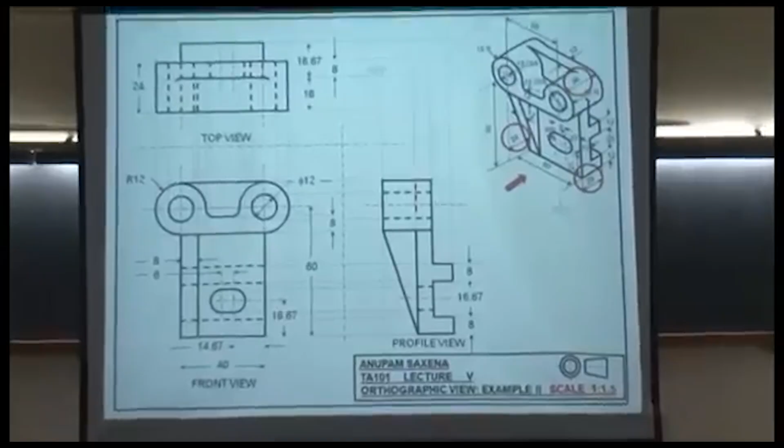So we were discussing this example before. You know, I'm really very glad that you have started thinking in class. All right, settle down. So quite a few of you guys had questions about the drawing that we were discussing yesterday. In particular, I had drawn an arc here, or fillet, if I may call, and a fillet here, and many of you said, if there are two fillets here, then this actually happens to be a smooth surface, and correspondingly there would not be any line here, here, and here. True? Okay, so this was the doubt, no?

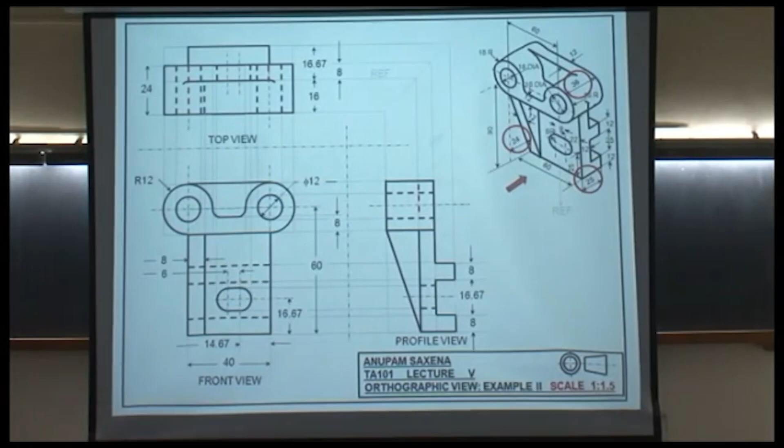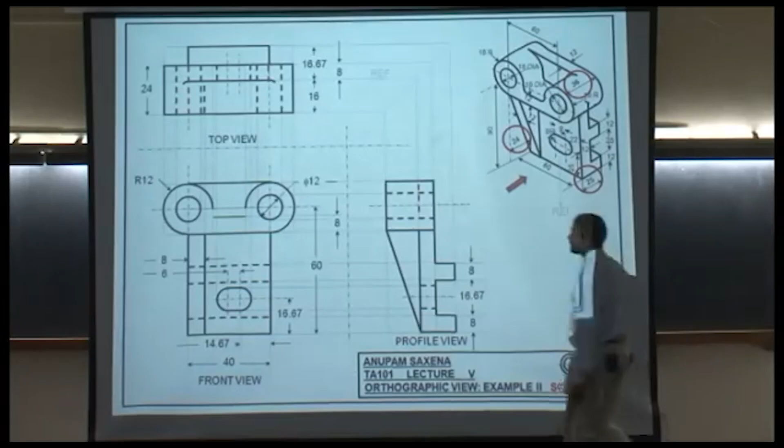Let me propose a few changes in the drawing. What I do is I let go of these arcs, I have a line, I extend vertical lines from these points, and if this is the scenario, then do you think that I'll be getting the corresponding lines in the other two views? So I'll be getting the corresponding lines in the other two views, okay? But think from a realistic viewpoint. Is it possible for you to manufacture this object with perfect 90-degree angles here and here? Yes or no? No.

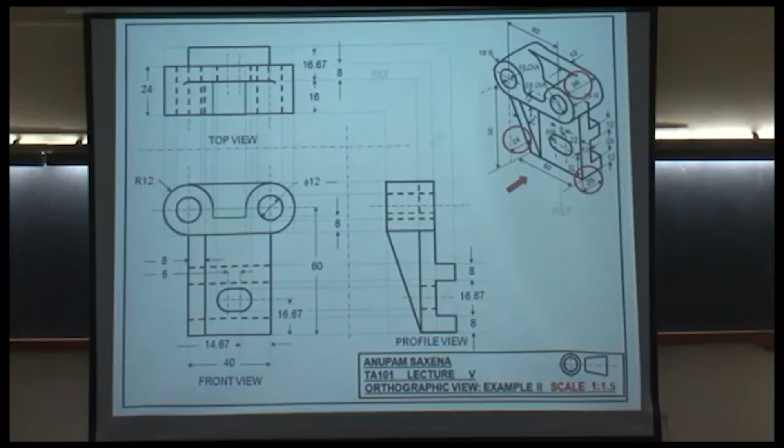Realistically, there would be a little curve here and a little curve here, okay? So let's draw that. A little fillet. It's probably not so discernible, just a little fillet, but the corresponding lines in the other two views will still remain, okay? All right. Any questions? Yeah? Tell me where are these lines? Can you show this model to me?

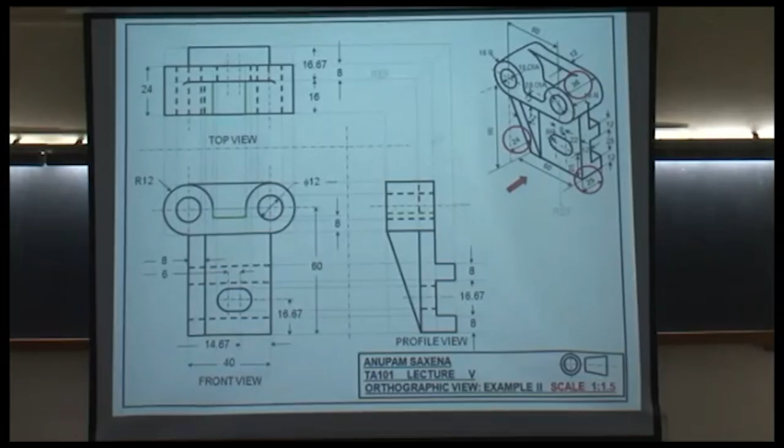All right, so just for your benefit, since you have worked quite hard, this was the initial drawing, and in fact this was a question that was raised by you. So this is like a smooth surface, and correspondingly there would not be lines in the other two views. Makes sense. But what I'm proposing is a slight revision. What if I let go of these smooth curves, have a horizontal line, extend the circular arcs through these vertical lines, and I get perfect 90 degrees. Then I'll have those lines. Why not?

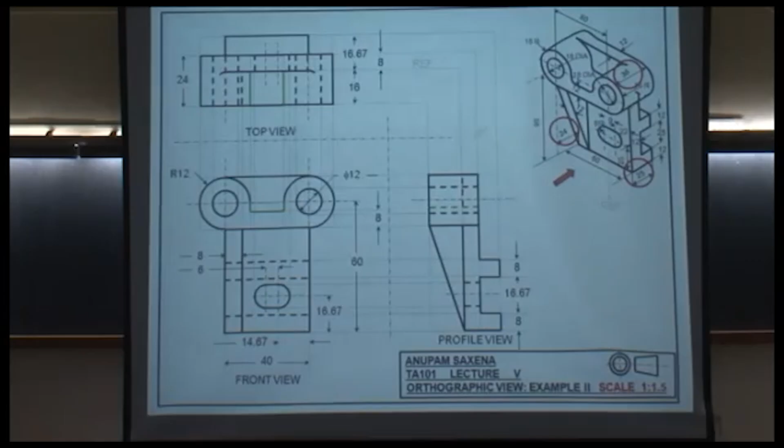In this scenario, are we going to be having those lines? We will. We will, right? Now, there's the theoretical aspect and there's the realistic or practical aspect, okay? Practically, it will be a little difficult for you to make a perfect 90-degree angle. It will be difficult, okay?

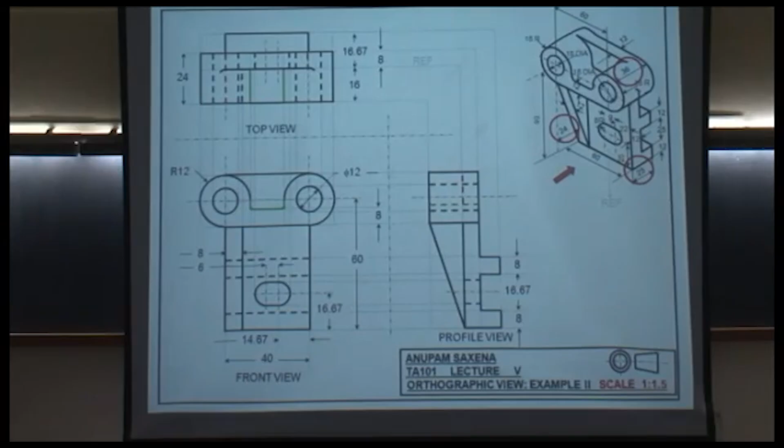So practically what we do is, you'll actually be seeing surfaces like this, okay? Just a little fillet, just a little fillet. But assuming that these two angles are 90 degrees in the front view, you will actually be seeing those lines. Slight revision that I proposed. Okay.

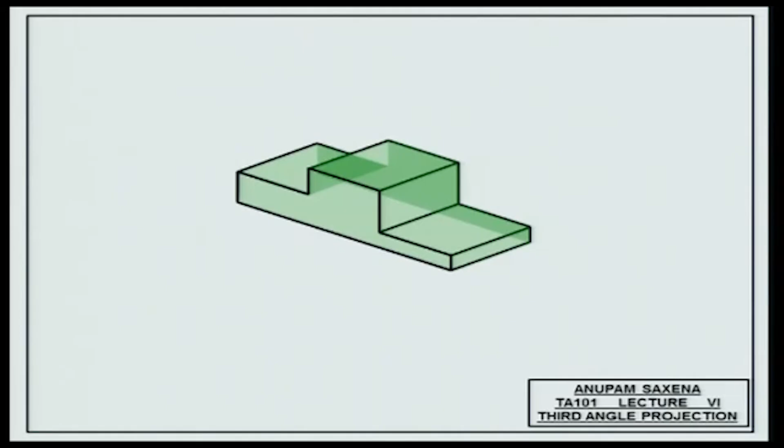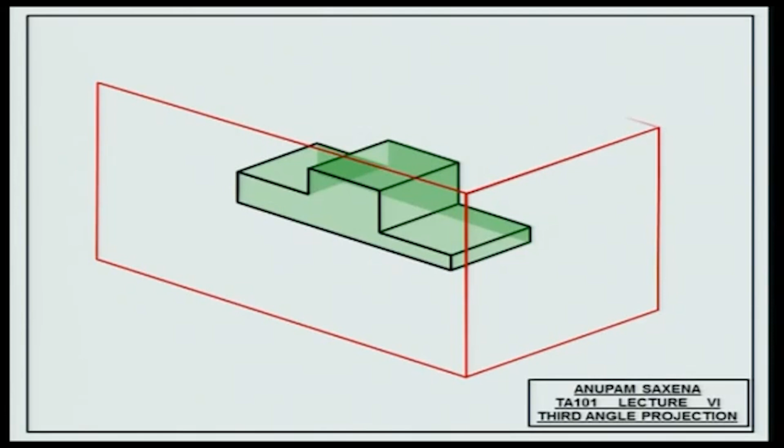You had a plane in between you and the object. You imagined that there were light bulbs all along the edge of the object that emitted light along 3 orthogonal directions. So this was the plane on the right, again in between you and the object. On top, again in between you and the object. These are the lights.

The light rays falling on the vertical plane, and this is what you would see if this plane was a photographic paper. This is what you would be seeing from the top, and this is what you would be seeing from the side. We have done this before, right?

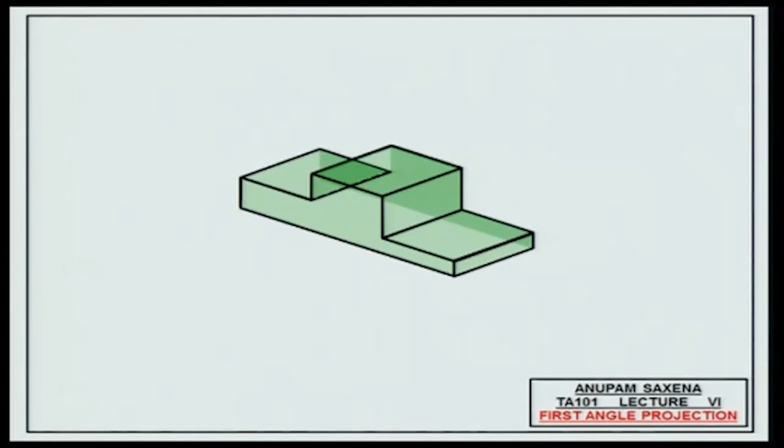Let's consider the same object, but we will consider a different scenario. We'll say instead of the plane being between you and the object, the plane is behind the object. So the object is placed between you and the plane. So this is the vertical plane that's behind the object. The horizontal plane is to be placed below the object, and the profile plane is to be again placed behind the object.

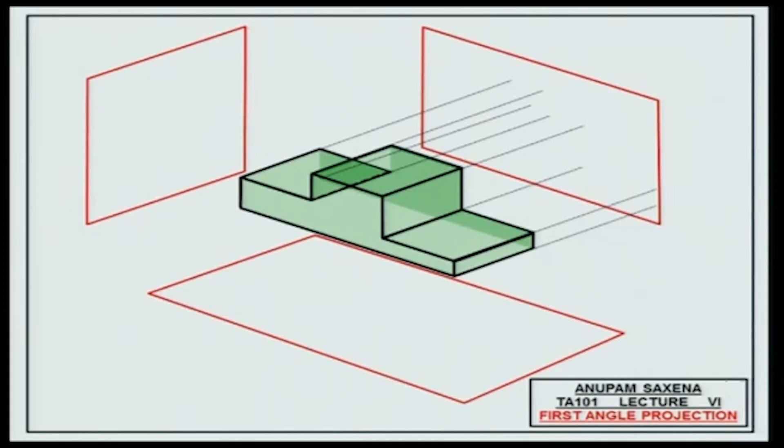All that has happened is the scenario has changed, the location of the plane has changed relative to you. In the third angle projection, the plane was in between you and the object. In the first angle projection, the plane is behind the object. Okay, and let's do the same exercise. Rays falling on the plane. What will these rays capture? What will these rays capture?

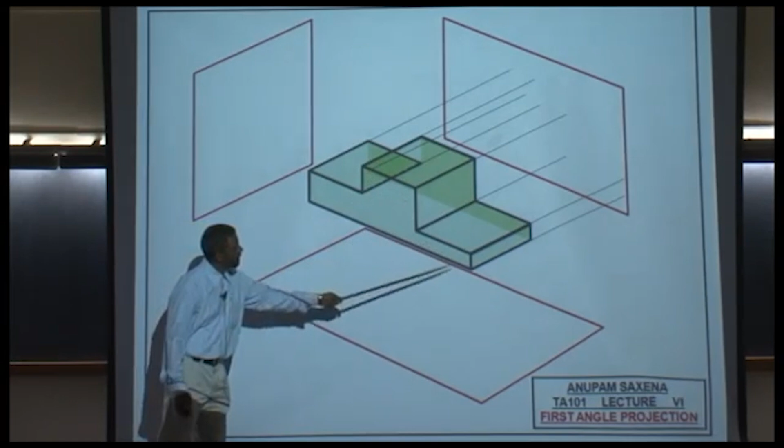The light bulbs are here. So these rays will essentially capture the loop that you see. Now note that the loop is coming from the front. The loop is going onto the plane from the front, not from the rear side of the object. Okay, once again. Right?

So what's the impression that the horizontal plane is going to see? Almost the same thing. The loop is going to come from here, from the top surface of the object. This one and this one. Once again, it's coming from the top of the object. How about this? Okay.

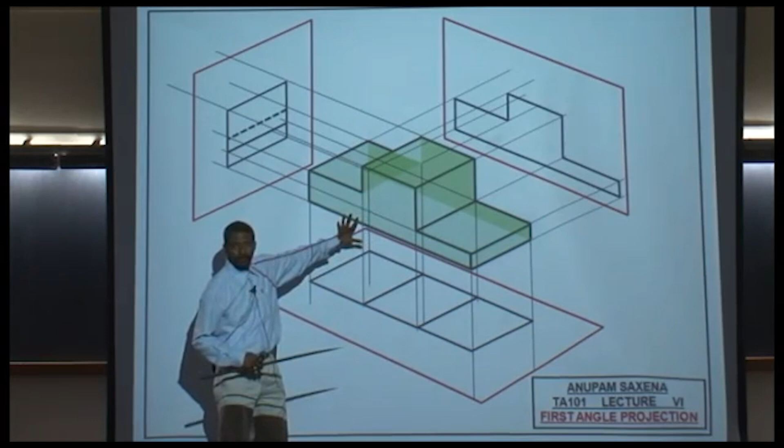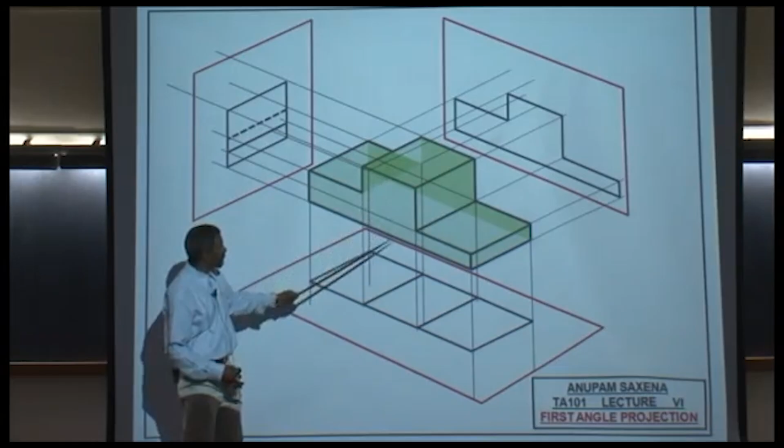Right, so what's actually happening? This plane is capturing what you're seeing from here. This is what is happening actually. This plane is capturing what you're seeing from the top, not from the rear of the object, but from the top. And this plane is capturing what you're seeing from here. Right? Okay?

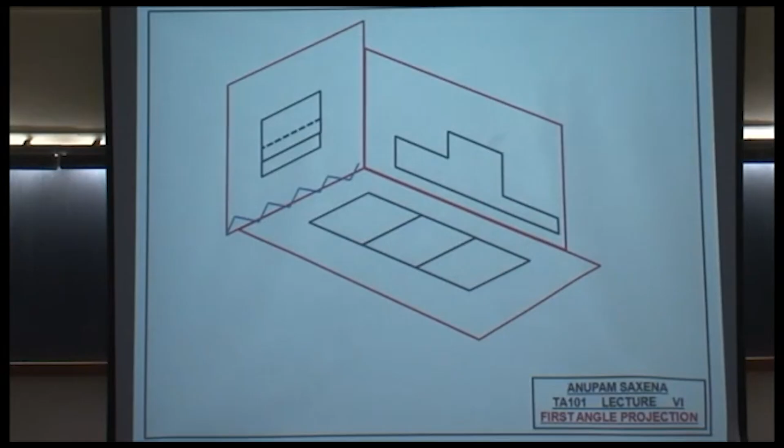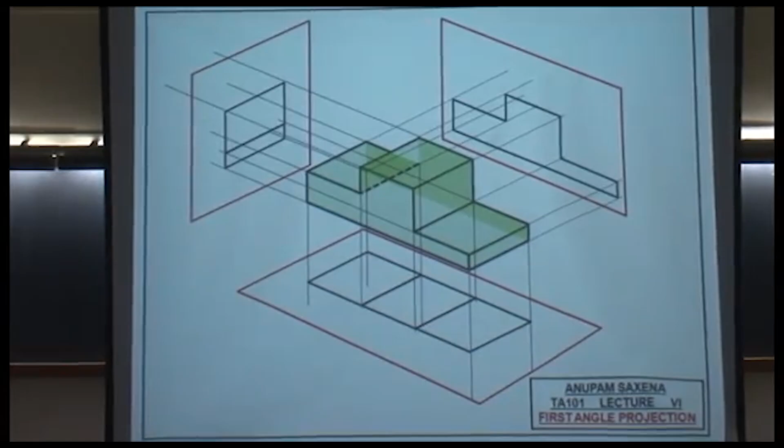Let go of the object, retain the impressions on the 3 respective planes, join these guys together, with that boom, tear this part off and unfold. Yeah? It's not from the other side.

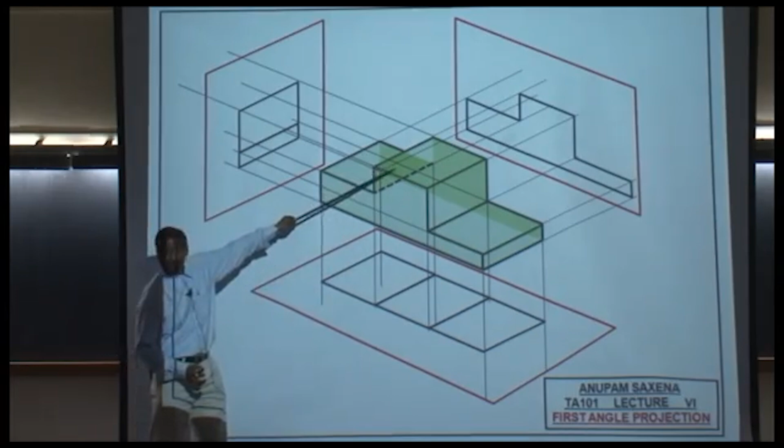If this is the direction of your frontal view, that plane behind the object captures the impression of the object as if you're seeing the object from this side. This one is from the top. This one is from here. So you need to be a little careful in trying to comprehend this.

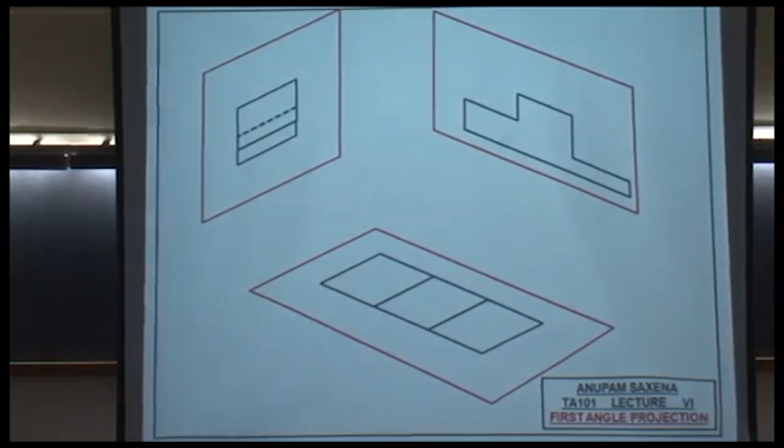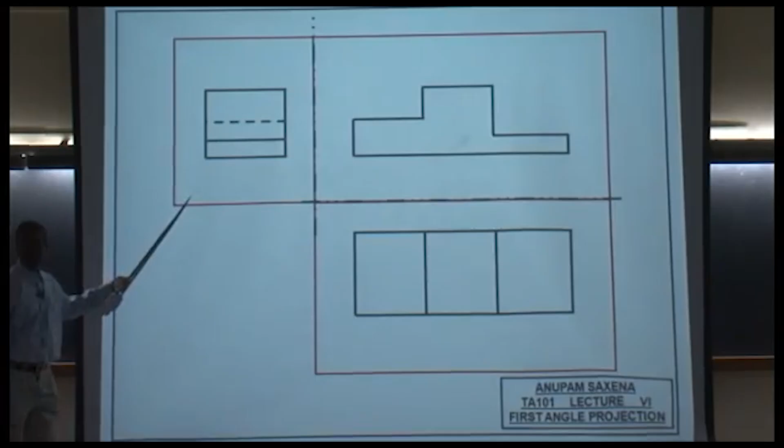Okay, once again, join these guys together. Tear this hinge, and unfold. Where is your front view now? Where is your top view now? Doesn't make sense, right? Top view at the bottom. Which view is this? The right side view. You were seeing the object from the right, so it's the right side view. Okay?

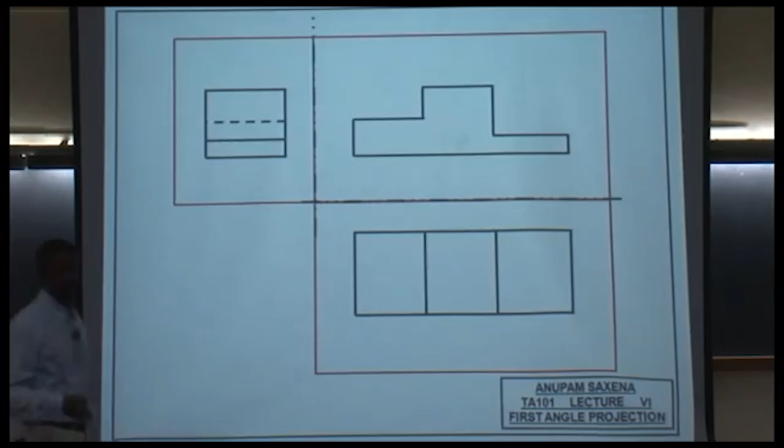Okay, so it's always a nice idea for you to get the concept so that you don't have to remember. And if you have to remember, then this is a very simple golden rule that I used to follow when I didn't understand this. In the first angle, the top is at the bottom of the front and the right is to the left of the front. Just the opposite. Okay? But this is the concept that's important, be it the third angle projection or be it the first angle projection.

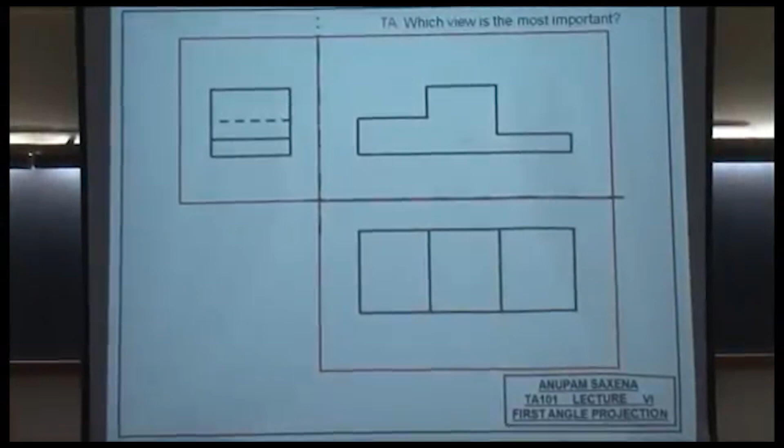You have been working with third angle projection. You have drawn the front view, the top view and the side view. Okay? Now can you answer this question to me or to yourself? Which of the three views is the most important? Which of the three views is the most important? Have you guys heard of something called FTP? FTP? File Transfer Protocol? Nah. That's the front view, top view and the profile view. So which one is the most important view? Front?

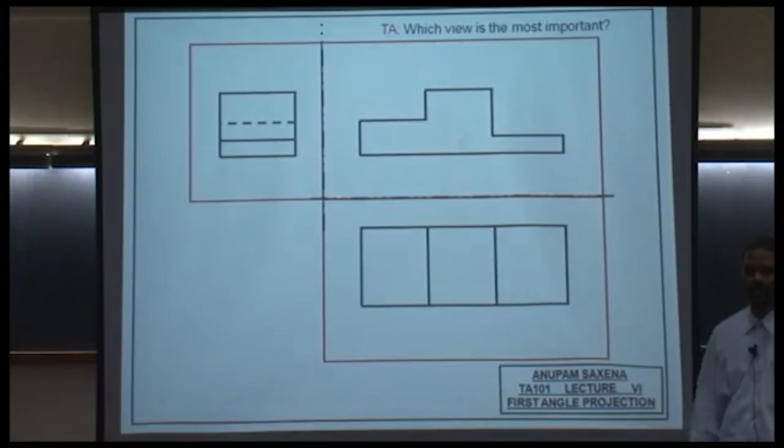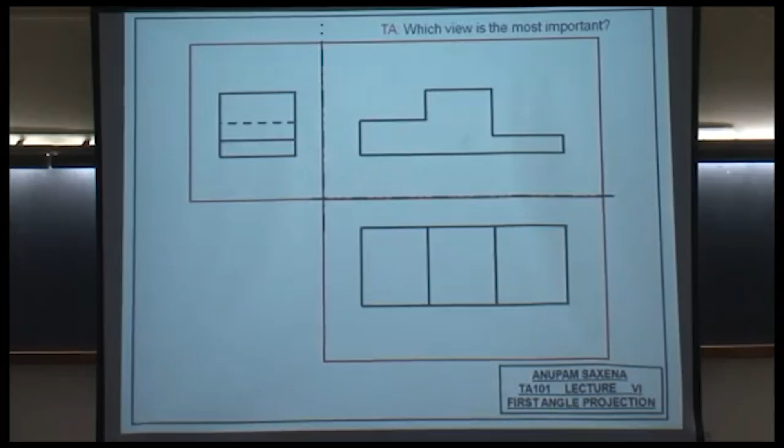Well, the choice is yours. But conventionally, we choose the front view to be the most important view. Okay, and having said that, we choose the placement of the object in such a way that we are able to give as much details in solid lines, not hidden lines, in the front view. What we try to do is we try to minimize, if not eliminate, the presence of hidden lines in the front view. Okay, that choice is ours. Right? So the front view is the most important. Then the top and then the profile, hence FTP, front, top, profile.

You know, I have never gotten somebody agree to me like that. Concurring with a song.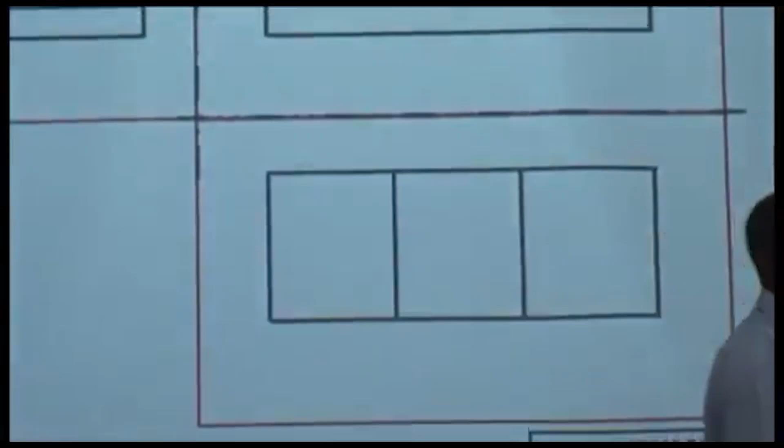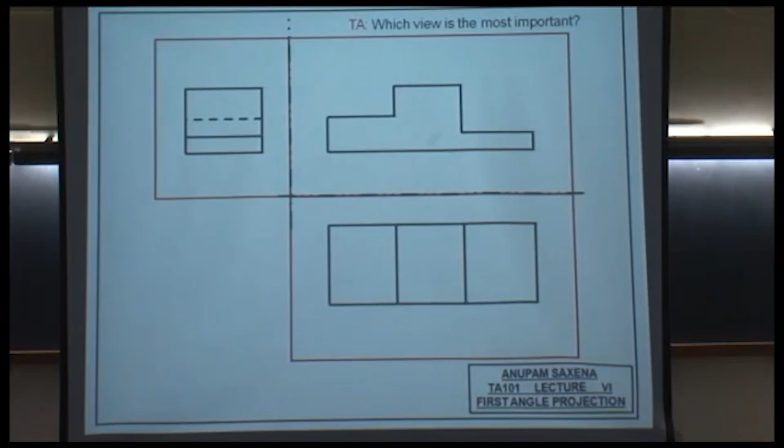Okay, why is this called the first angle projection? Why is this called the first angle projection? So if you imagine that your drawing is divided in 4 quadrants, your front view, which is the most important amongst FTP, is lying in the first quadrant, and hence it's called the first angle projection. Why is the third angle projection called the third angle projection? There your front view is here in the third quadrant.

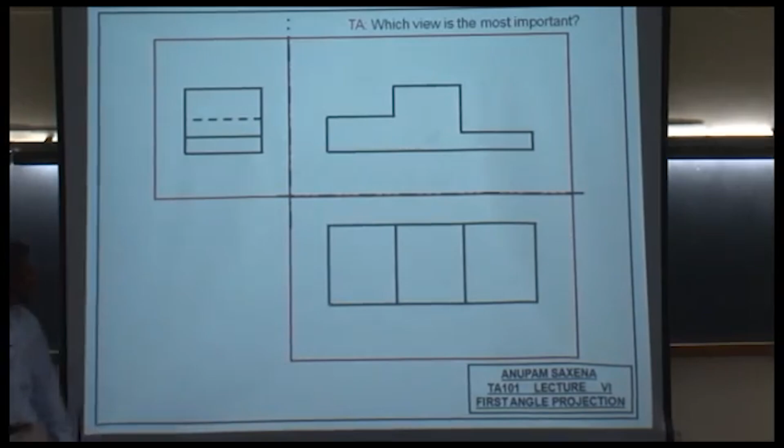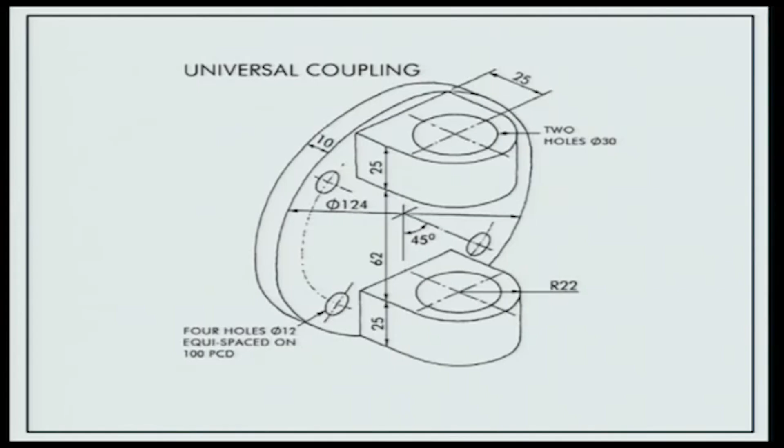Right? Okay, so let's draw this object in the first angle projection. Would you like to take 5 minutes to try to sketch? Okay, now. So before you start sketching, this is the front view direction, and you have to rotate the object like this. Okay? So rotate the object like this and then view it from the front and then start sketching. 5 minutes.

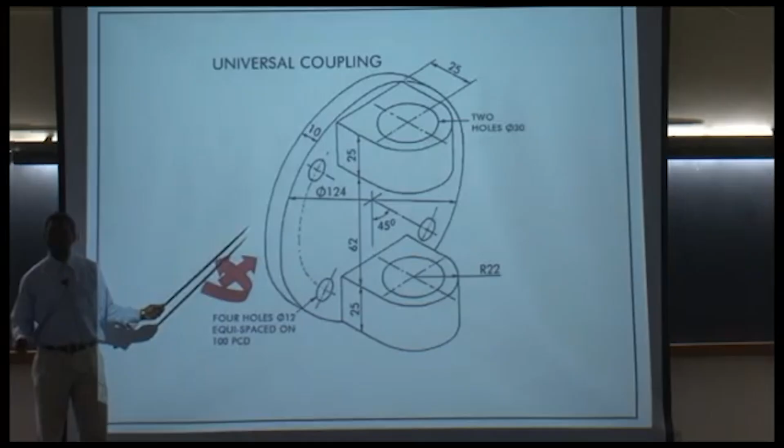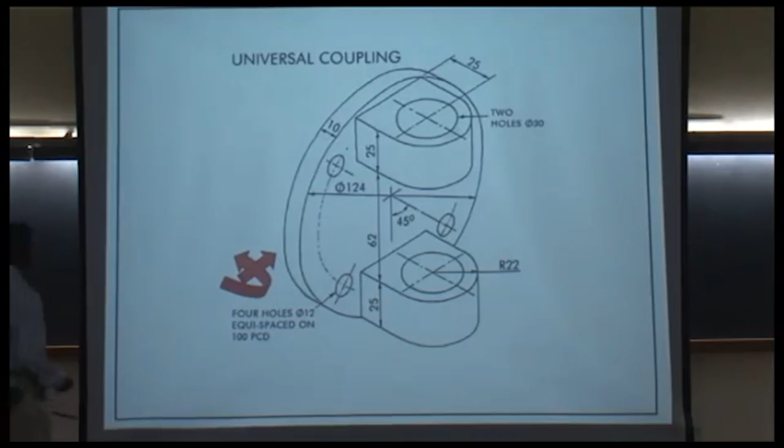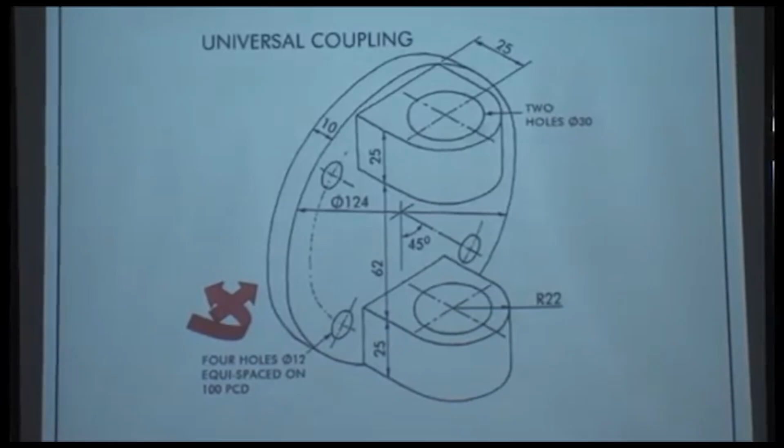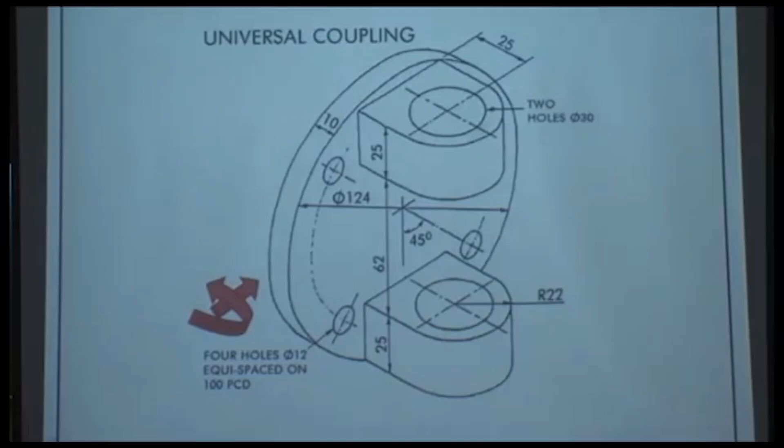You know, back in 1990, when I was in the 12th grade, we used to have this concept of the class monitor, right? So you have just graduated from grade school to grad school. So our monitor then was Sanjay Tiwari, and we used to talk a lot. We used to prepare for our JEE exams, and we used to talk a lot. And he used to have a hard time. He used to come up with a list of many students disturbing the class. And he gave the list to my class teacher,

and she goes like, Amit Raje, he was my classmate. And Amit Raje is all perplexed. He stands up, yes ma'am. Why were you talking? Ma'am, I wasn't talking, I was thinking. Okay, sit down, don't think loudly. Yeah, so don't think loudly. Huh? Sorry.

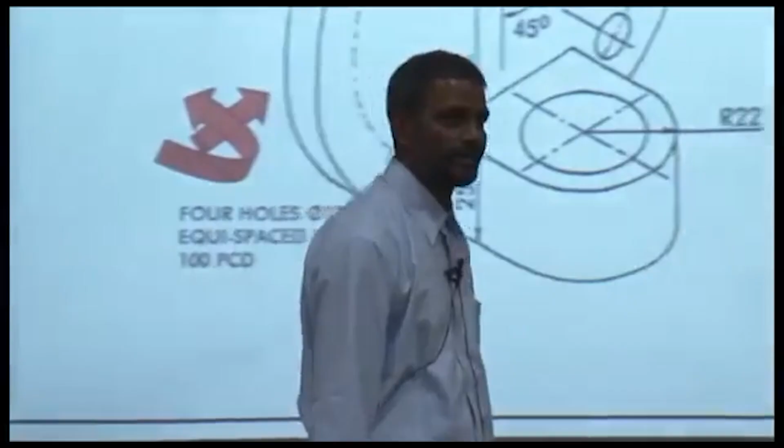I didn't want you to sketch that box. Should we start? It's already 2:29, so I still have about 20 minutes. So let me get started. Okay, so start with your bottom right box. Fill out the details.

This is the first angle projection. So your convention of representing the first angle projection will be different.

Can you hear me back there? Am I discernible? Am I audible?

So the convention to represent the first angle drawing will be slightly different. Again, truncated cone. Your front view is 2 circles, a set of concentric circles. What is shown on the left is what? Which profile? The right. Okay, so the profile on the right is shown on the left. So in the third angle projection, this guy was here. In the first angle projection, this guy will be here.

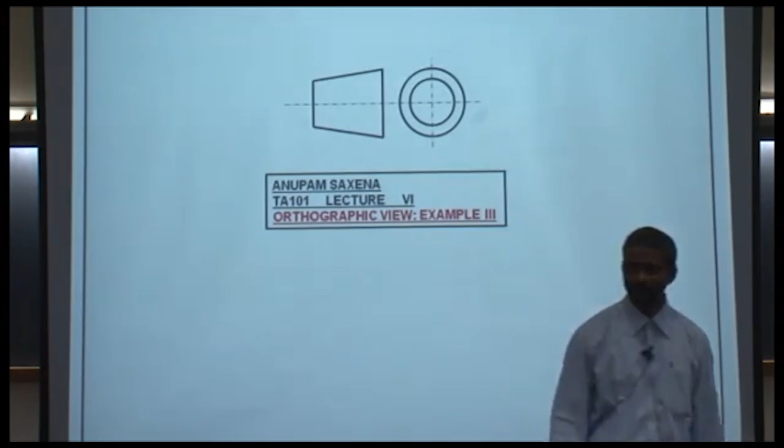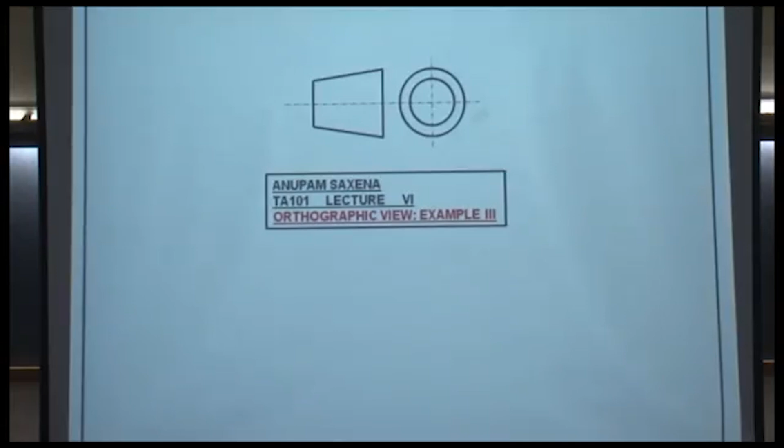If I were to draw the orthographic projections of this, how many views will I use? 2, 3, 1, 2. Why not 3? The third is the same as the second? Okay. So although we are practicing 3 views at this time, later on you will probably realize that in certain situations 3 views are redundant. At times just 2 views suffice. And at times 3 views are adequate. And at times even 3 views are not able to resolve the uniqueness of the object. So we had seen that cube example in our second lecture or third lecture.

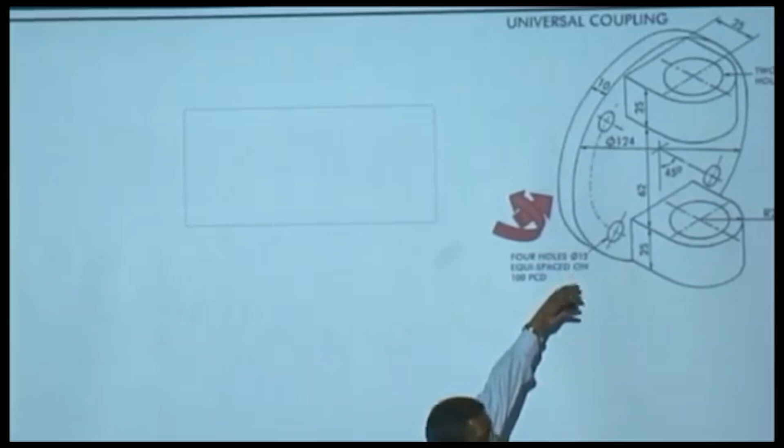Get this convention on the top right of the bottom right box. Place it down here. Let's get started. Using the scale 1:2, most likely I am going to be using the scaled dimensions, not the true dimensions. The first thing I would do is I would start with the bounding boxes. Once again, I have rotated this object like so, and that is my frontal view direction.

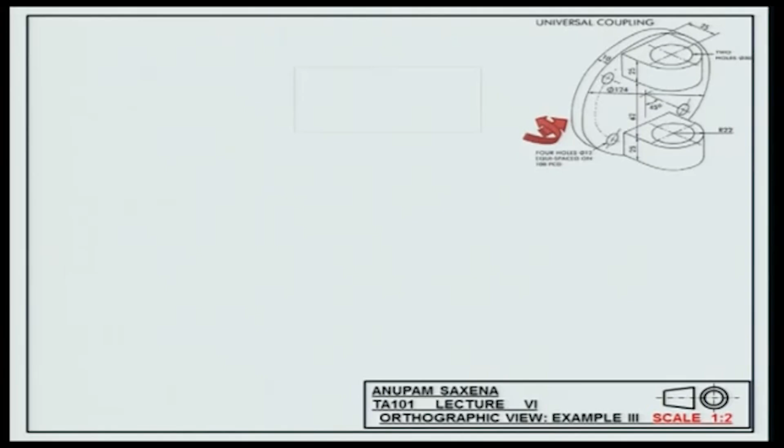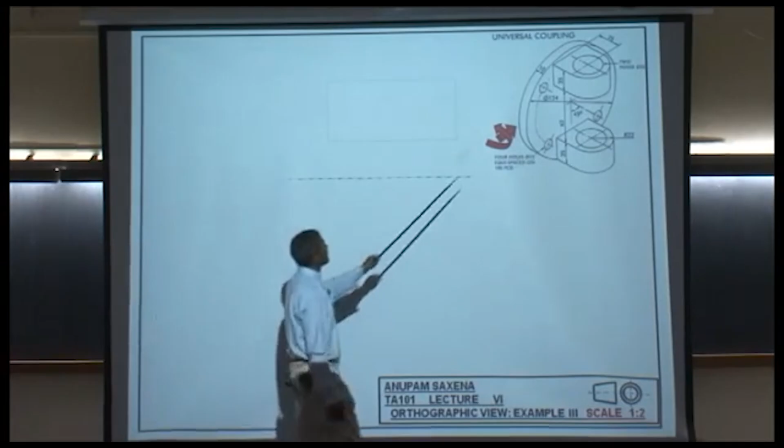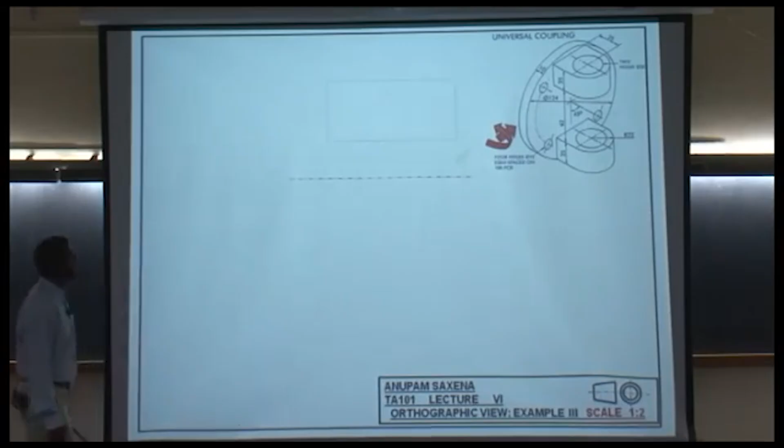All right. What's the length of this box? What am I drawing there? Folks, what am I drawing? The front view. What's the length of this? The same as the diameter of the big circle, which is 124. Right? What is the width of this box or the height? That is 10 plus 25, whatever this length is. How much is that? 25 plus 22. Okay, 25 plus 22 plus 10, 57.

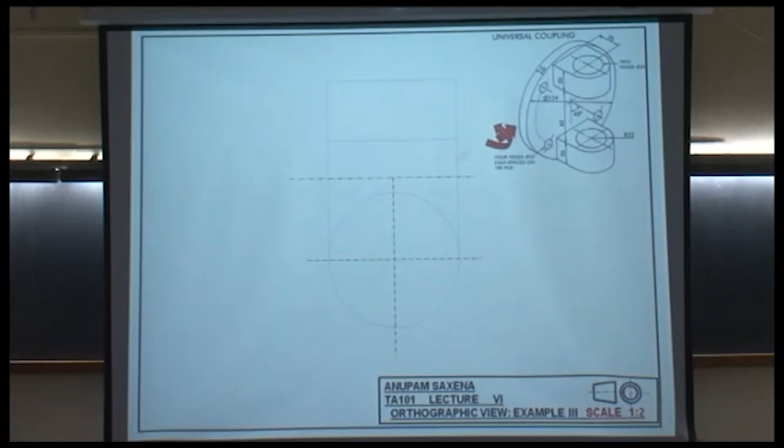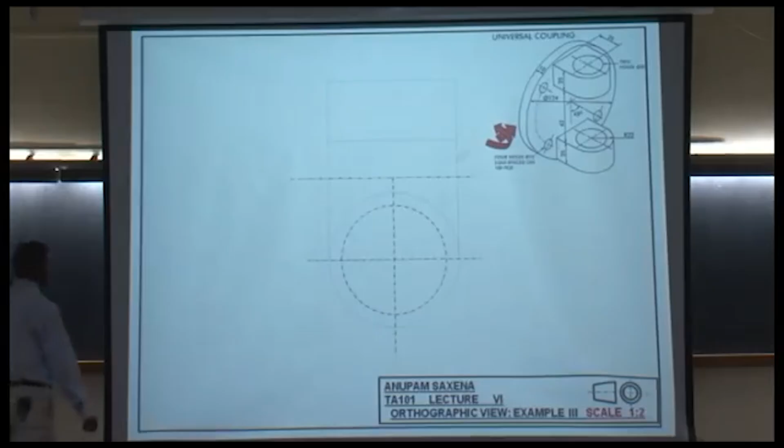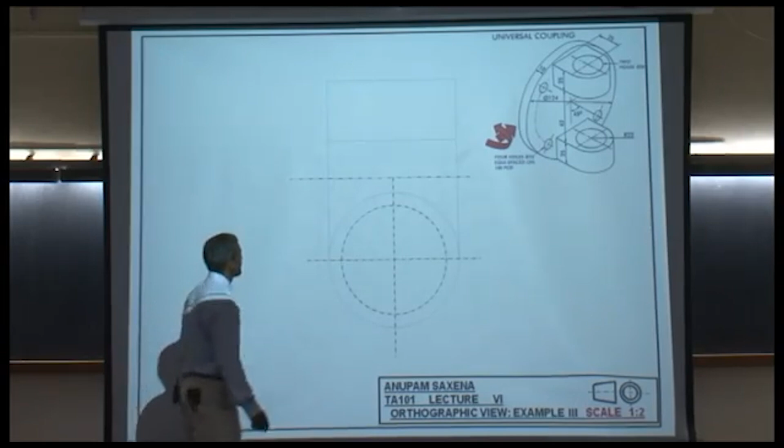Good. Hinge line that separates the top view from the front view. Projection lines that come from top. In the top view, you are going to be seeing a circle of phi 124. Since you are making a circle, you have to locate the center using 2 dashed dotted lines. I am showing this circle again using dashed dotted lines. Why is that? So this would bear the 4 centers of the smaller circles. The circle is represented by PCD, pitch circle diameter. So hence I am using dashed dotted lines.

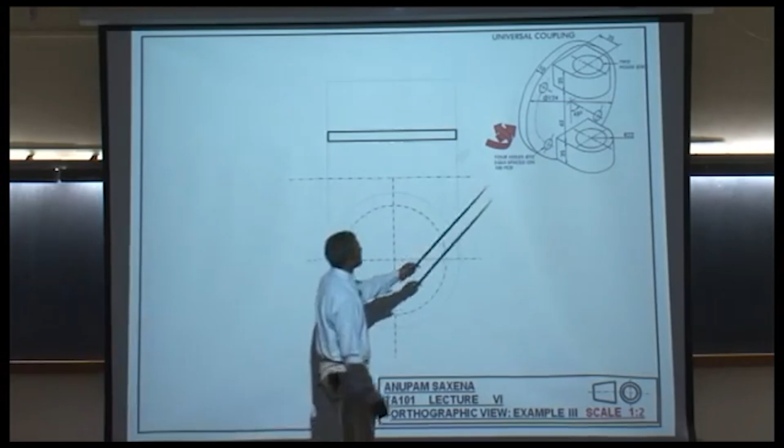Let's get started. Bottom line shows up. The vertical line shows up. This is of height 10. This line shows up. We complete this box. So this represents the front view corresponding to this disk, right? Extend the center projection line up. Now what am I doing here? What am I doing here?

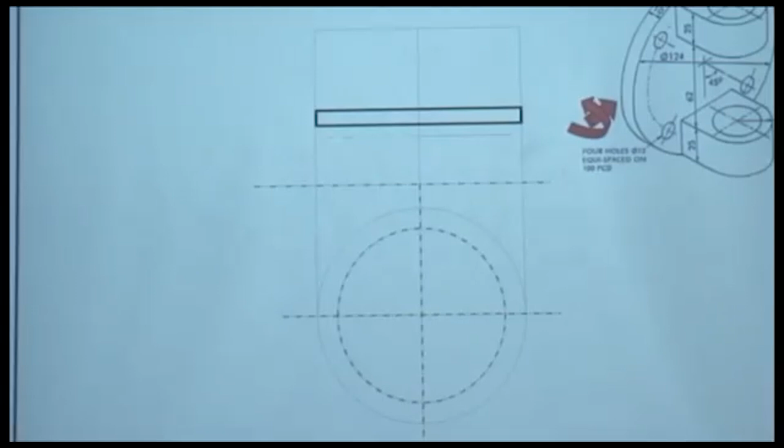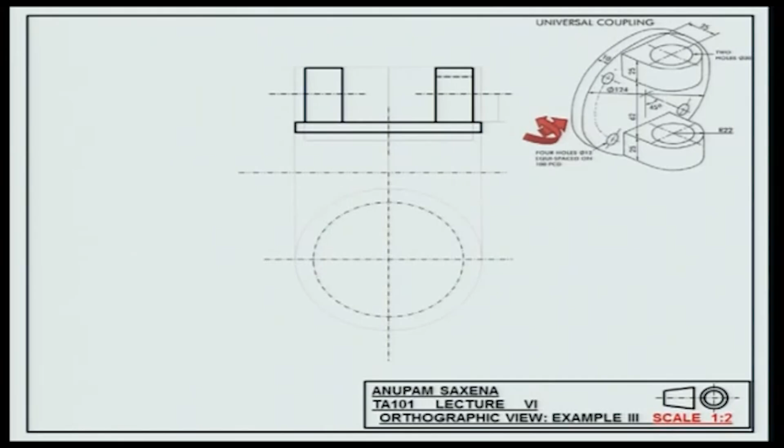I am trying to draw these two appendages. They will essentially look like rectangles in the front view. You will be able to figure out the dimensions, so dimensions at this time not very important. So the height of course is 42 and the width is 25. Is that right? Then locate the center of these through holes. They will be at the same horizontal, and show the two holes using hidden lines.

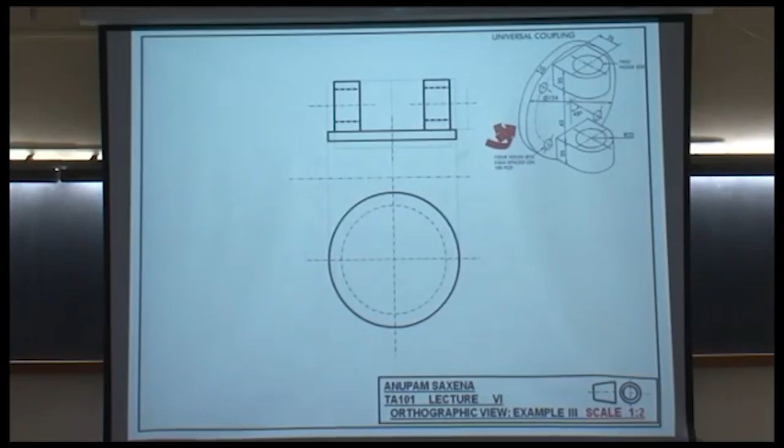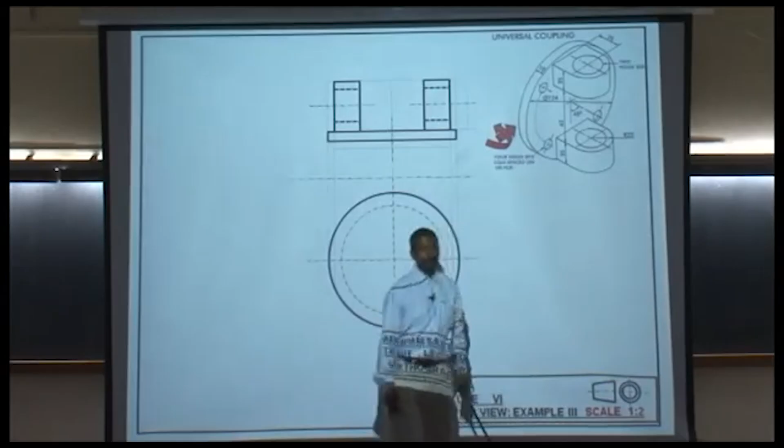Am I done? What is this node? So I still have to worry about these circles, right? But before I do that, let me try to work with the top view. Bigger circle. Now what I have done is I have projected this vertical line onto the top view from here. So essentially in the top view I am looking at these lines. This line here, the line at the back. I know the length, I know that the object is symmetric about the horizontal axis.

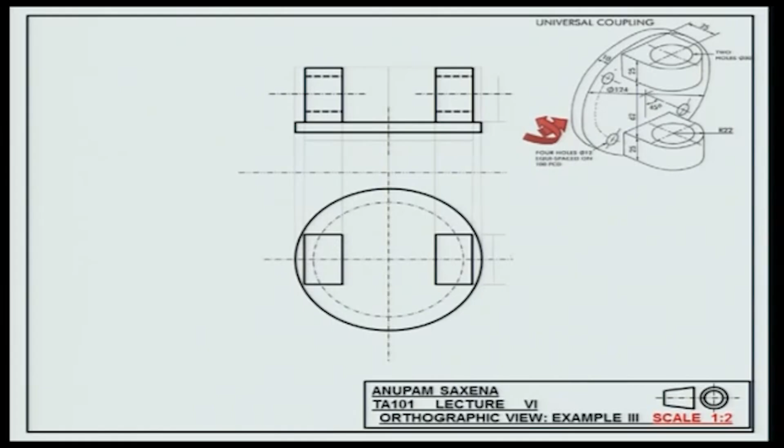Okay. I draw 4 rectangles. Sorry, I draw 2 rectangles. And then of course the voids within those appendages. Now I am locating the 4 circles and the pitch circle diameter. I locate the centers and rest is straightforward.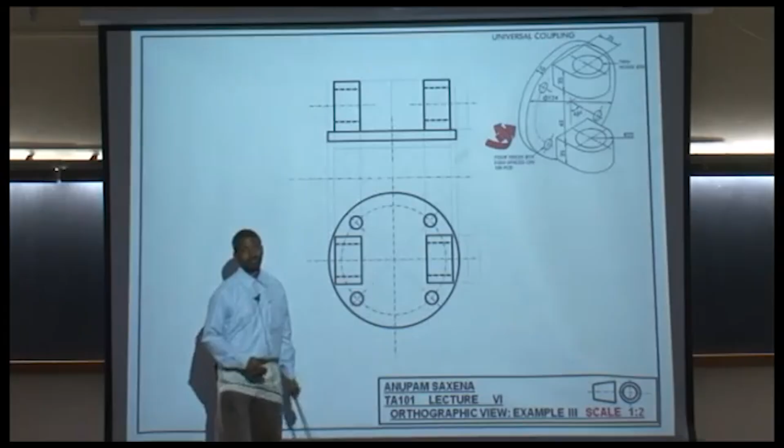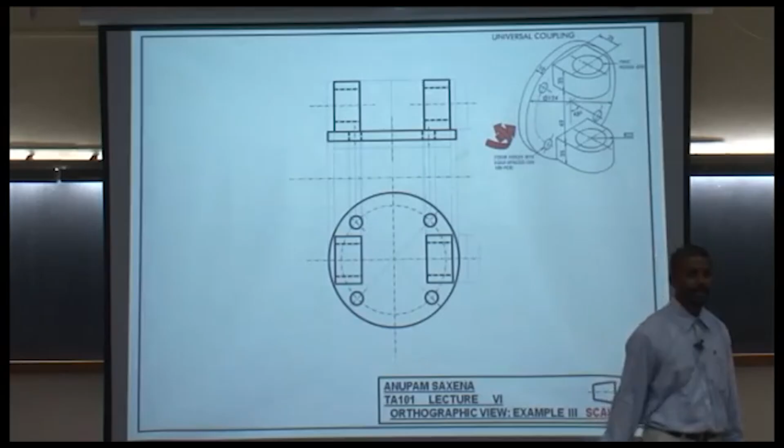Once I have located these 4 circles, I can take the projections of these onto the front view and show them using hidden lines, which is what I do here. Locate the centers of the 2 cylindrical voids and locate the voids themselves in the front view. So far so good. Am I done with the 2 views? Yes or no? Well, of course dimensioning remains, but I am not worrying about that as of now. How about the profile view? Where will I show the profile view?

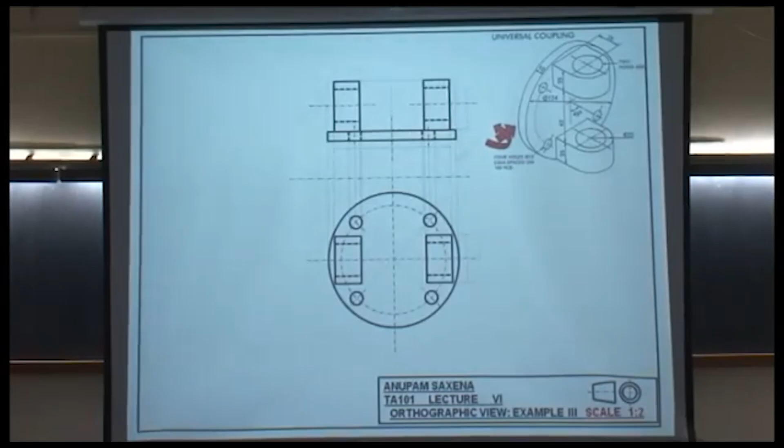Left of the front view. So you remember, you're relating the top view with the profile view using projection lines and a 45-degree angle. Yeah? Do you remember that from this week's lab? How would you do the same exercise here? Start taking the horizontal projections from the top view. Draw a 45-degree line, go up, and join the projections emanating from the front view. Exactly the same exercise.

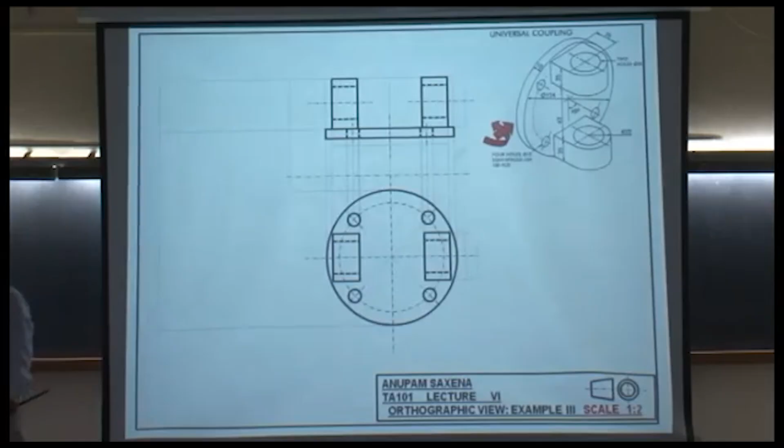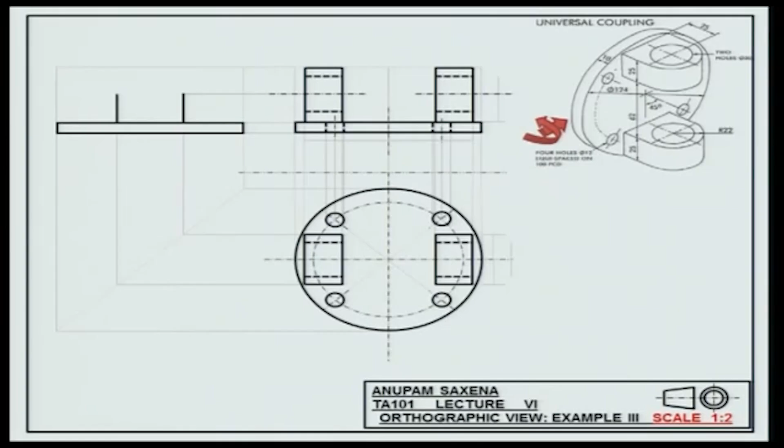Okay, why? Because this dimension has to be equal to this dimension. Right? Once you have the bounding box ready in the profile view, start drawing. A disk will again look like a rectangle. Get the projections from these, if I may call, flanges. Okay. Get the center. Extend the lines. Locate the center. Draw a semicircle. And draw the inner circle.

Okay? It's okay. If you want to take a quick nap, it's fine.

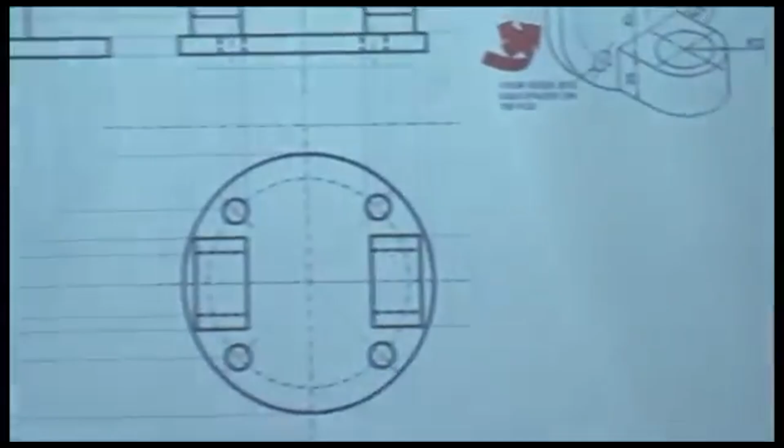And then what? Relate that circle to the lines in the front view via construction lines. And of course the top view. And from the top view, get the projections corresponding to the smaller circles on the pitch circle diameter. Locate the centers and represent the smaller circles using hidden lines in the profile view. Okay? Of course, that's the top view. At the bottom of the front view, that's the front view.

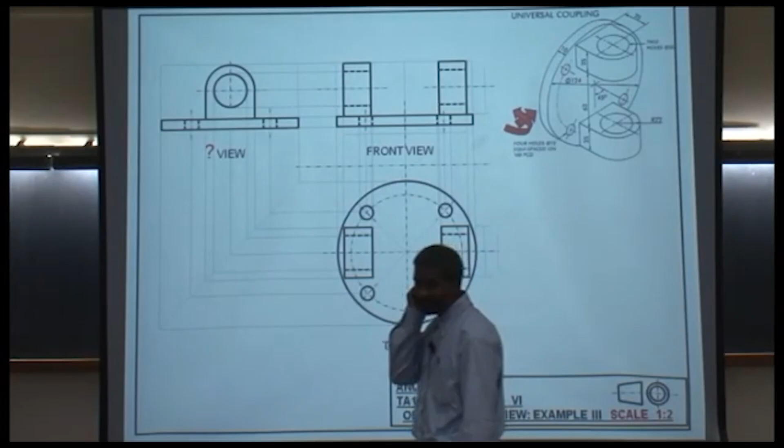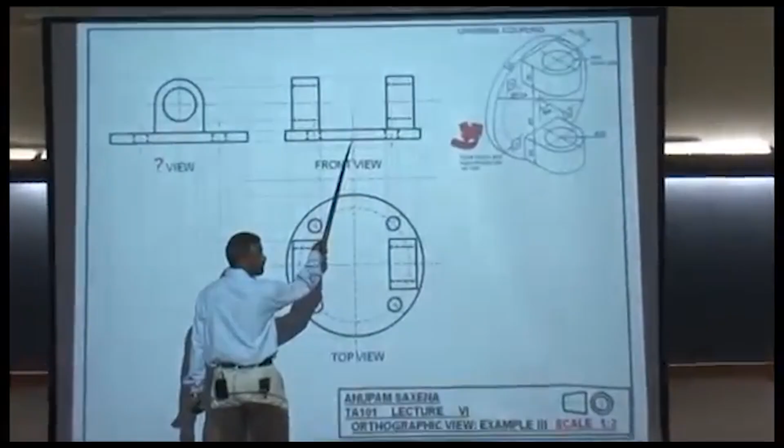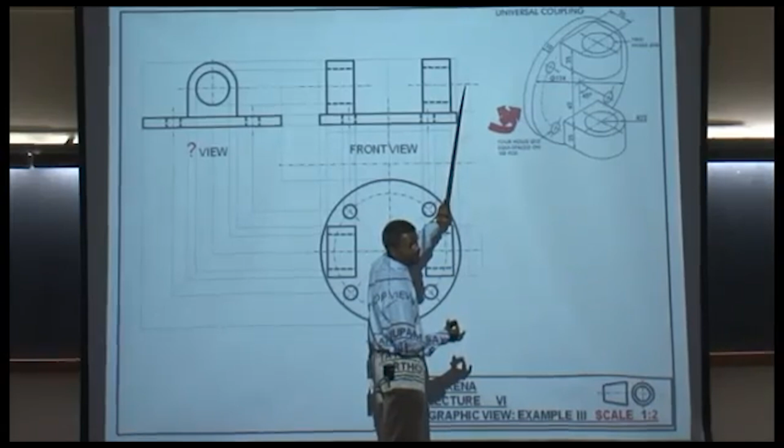Which one? Right or left? Right. Okay? Any questions? Yeah? In the front view? Center of what? Because the cylindrical void is like so. So this center line represents the axis of the cylinder, axis of the cylindrical void. Right?

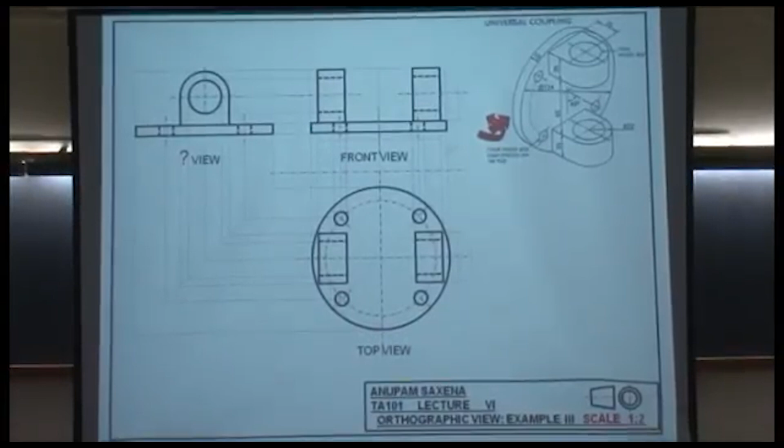One view is redundant. Why do you say that? So what you're suggesting is just two views are good enough for us to represent this object? You could be right. What is the what? Perfectly, perfectly. Conventions. Different people use different conventions. So some people are comfortable with the first angle projections, the other ones are comfortable with third angle projections.

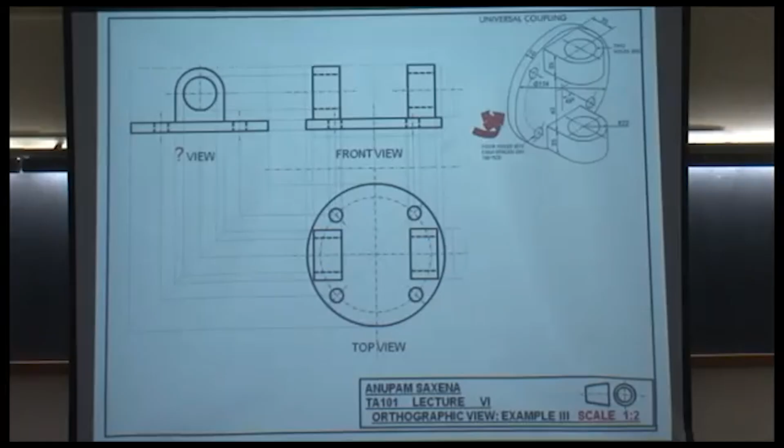Can you stand up, please? What's your name? Ashish. Louder. Ashish Agarwal. Louder. Ashish Agarwal. Turn around. Come up. Stand by my side.

So this friend of mine, Ashish Agarwal, asked me when he was doing the second lab, sir, can I draw things in the first angle projection? He was so eager to draw this in the first angle projection. So I thought, why not tell you all about first angle projection, so that just in case he happens to draw in the first angle projection, you guys can all understand. So there are different conventions that people use. Yeah, please. Any other? Yeah.

We don't draw dotted lines for smooth fillets. I didn't say that.

You know, I have a lot of anecdotes to share with you. One of them goes like, when I was in the 10th grade, I was reading a book, and I read a quote by some character in the story, and I liked that quote very much. I am without politics. I am without politics. Okay? So please let me not behave as a politician here, asking you to be quiet every time. If one of your peers is getting up and asking a question, please lend a polite ear to him or her, because otherwise you will not be able to understand his or her question, nor will I. Thank you.

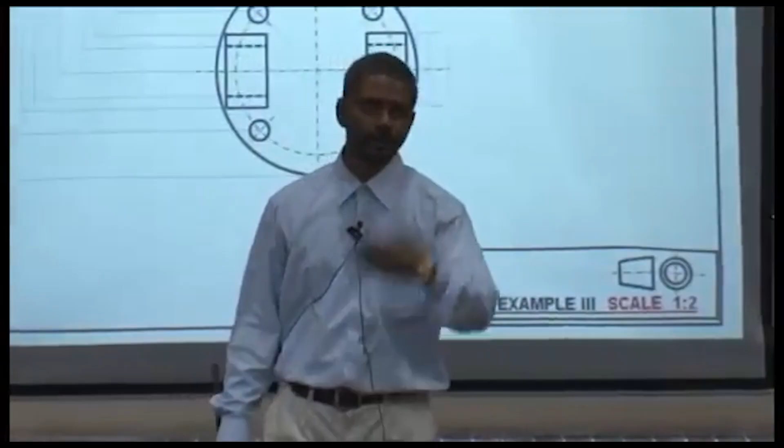Hold on. Keep that question in mind. We still have time, so I'll come back to you. Okay. Any other question pertaining to first angle projection? Yeah. Shouldn't the top view? Well, the choice is yours. You can choose the principal view to represent the front view. I chose the frontal view to be that. But you can choose differently. It's perfectly fine. Any other question?

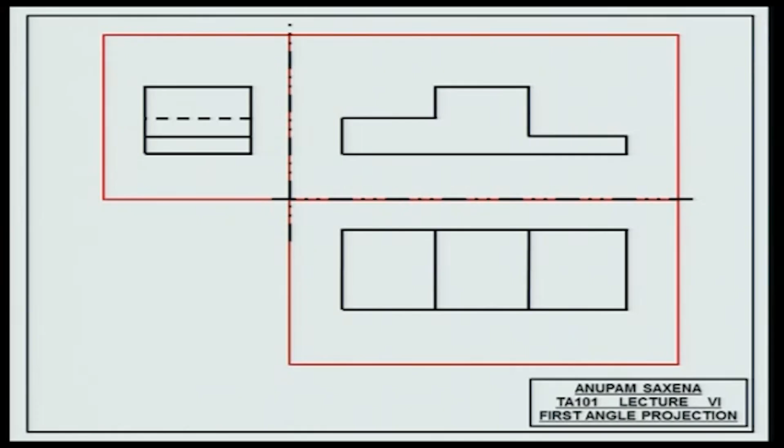Okay. So just to emphasize, this is the what? First angle projection. Why? Because the front view is lying in the first quadrant. Okay, and in the third angle projection, the front view lies in the third quadrant. Hence the names.